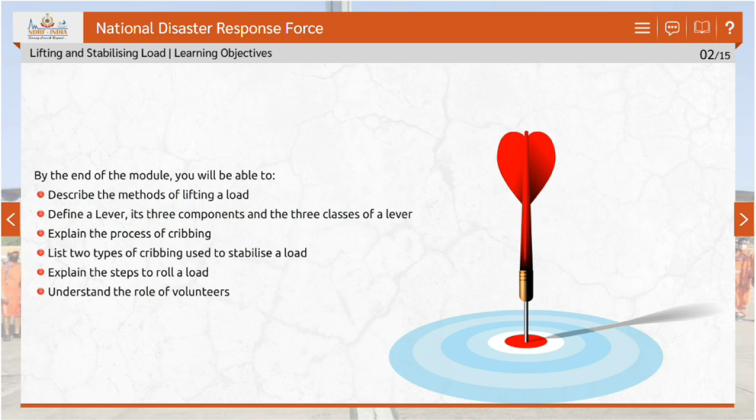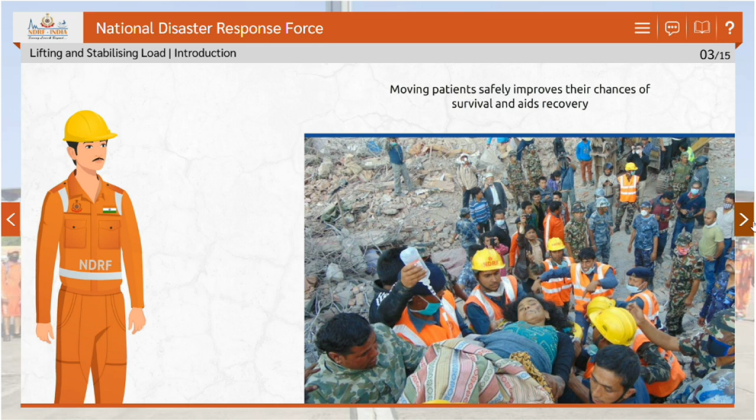When natural disasters or large-scale emergencies occur, it is important to move people who are hurt or in trouble to a safer place. The safe movement of patients will improve their chances of survival and aid in the recovery process. It is also important to clear debris from the affected areas as it helps the rescue teams access the affected area and prevent further injuries.

But how do we move the patients to a safer place without causing them harm? And how do we lift heavy loads while preventing injuries? Let's find answers to these questions in this module. Let's begin with understanding the rules for lifting loads.

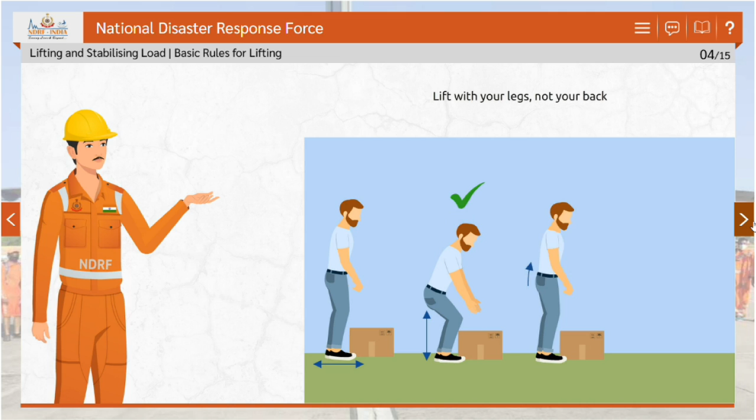In order to facilitate lifting and to prevent injury, we should maintain proper body posture. Here are the basic rules for lifting. Plan your move carefully and position your feet properly for stability. Lift with your legs, not your back. Keep your back as straight as possible while lifting. Try to avoid bending at the waist more than necessary. When lifting with one hand, avoid leaning to the opposite side.

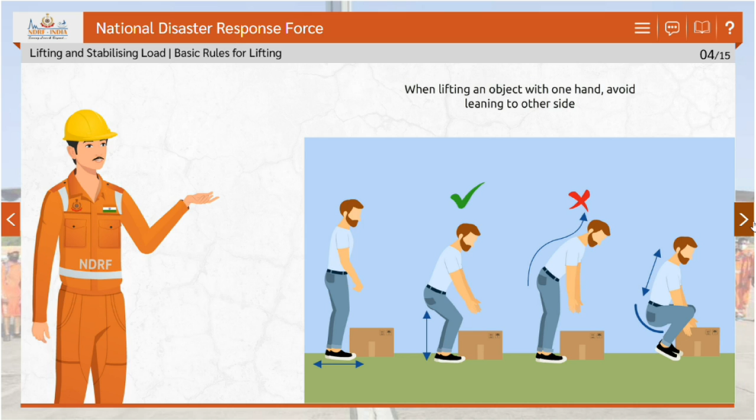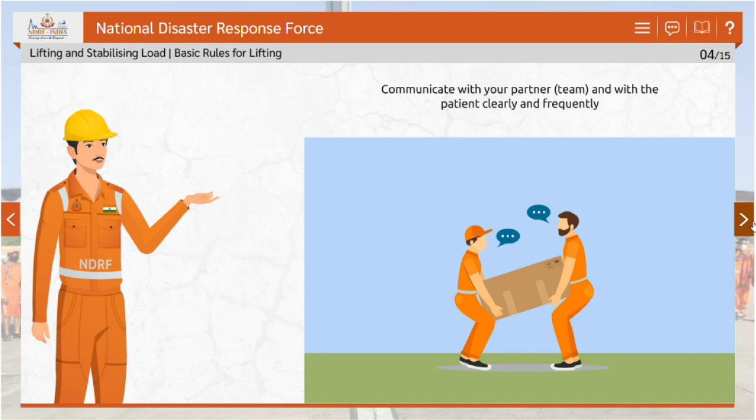Bend your knees to grasp the object, maintaining a straight back. Keep the weight of the object as close to your body as you can. While lifting a patient, maintain clear and frequent communication with your partner or team and with the patient. Maintain eye contact, an important aspect of coordination, and verbally coordinate moves from start to finish for safety and efficiency.

In disaster situations, lifting loads is a crucial task. It is essential to understand the principles of lifting a load to prevent further accidents and reduce strain. Let's now discuss the concept of lifting loads.

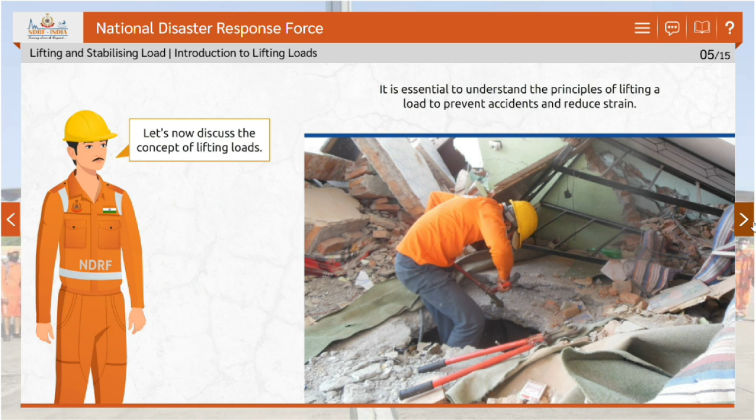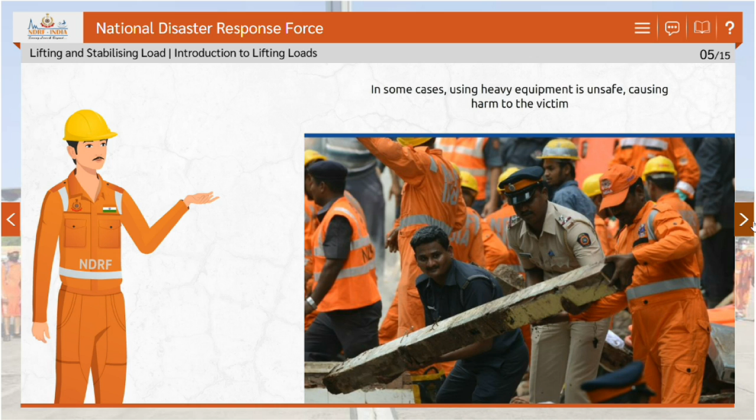Long ago, man learned that work done by machines is easier than work done with muscle power. However, in some cases, heavy equipment cannot be used because the movement or operation of that equipment might cause harm to the victim and lead to further collapse. In such situations, basic tools can be used to create tremendous mechanical advantage to lift large loads safely. Let's now discuss the methods for lifting loads.

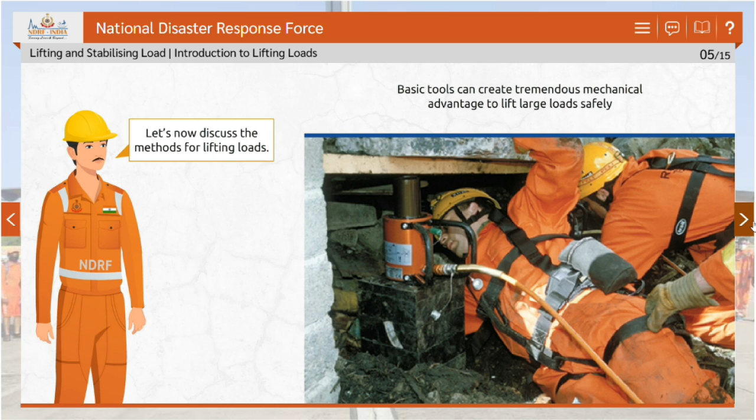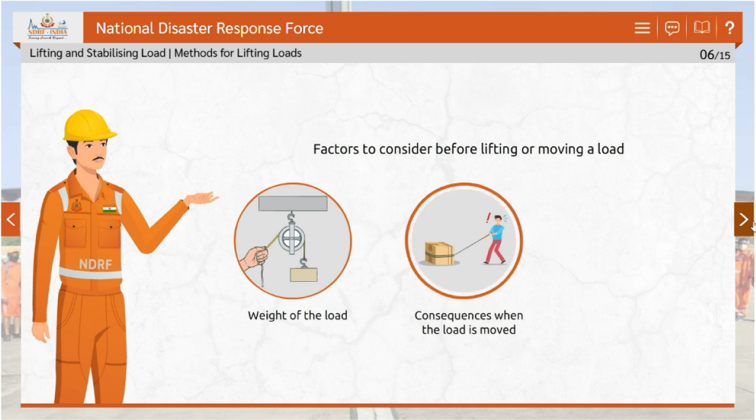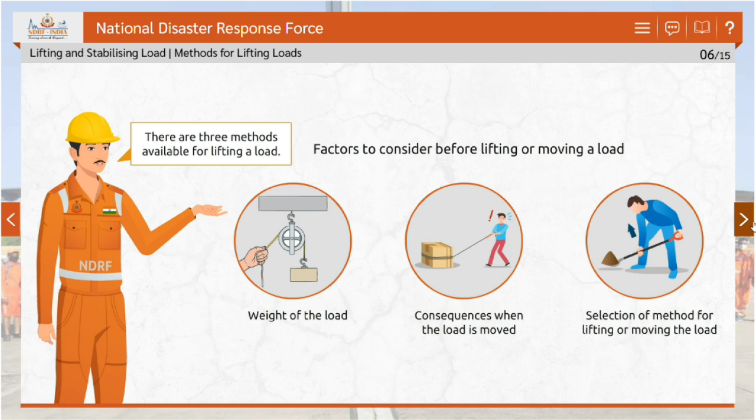Before lifting or moving a load, the following factors must be examined. Weight of the load, consequences when the load is moved, that is, what will happen, and selection of the method for lifting or moving the load. There are three methods available for lifting a load. These include the lever, the come-along, and hydraulic jacks or rams. Let's discuss these methods in detail.

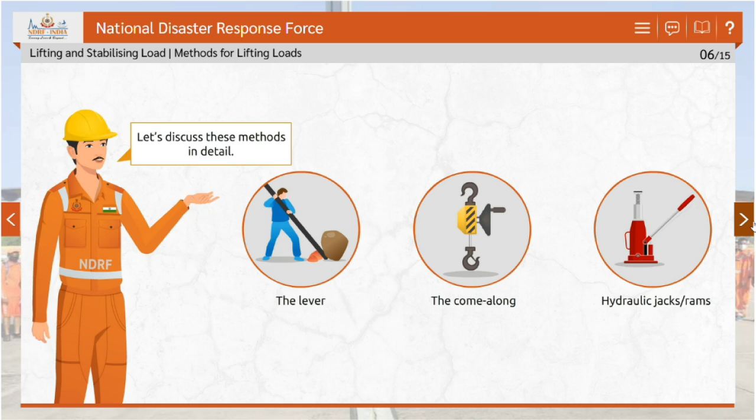The lever is a simple method for lifting a load. There are three components that make up a lever. These include fulcrum, load, and force. A lever is a rigid bar, either straight or bent, that is free to move on a fixed point called a fulcrum. The fulcrum is the object or place that supports the load when a lever is used to move another object.

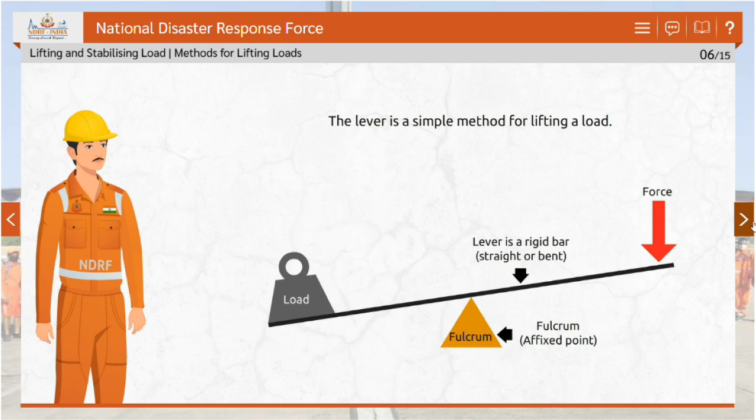Some of the applications of levers are moving a load that is too heavy to move by hand, pulling or hauling, and raising. Some of the common examples of levers are the shovel, crowbar, pliers, hammer, scissors, and wrench. There are three types of levers: Class 1 lever, Class 2 lever, and Class 3 lever. Drag the pointer to each type of lever to know more about it.

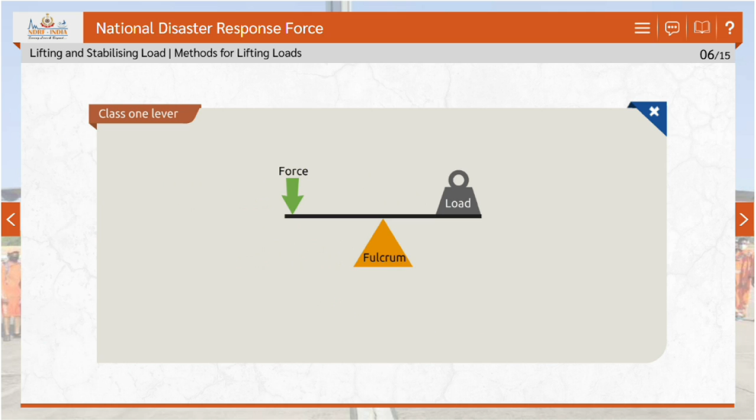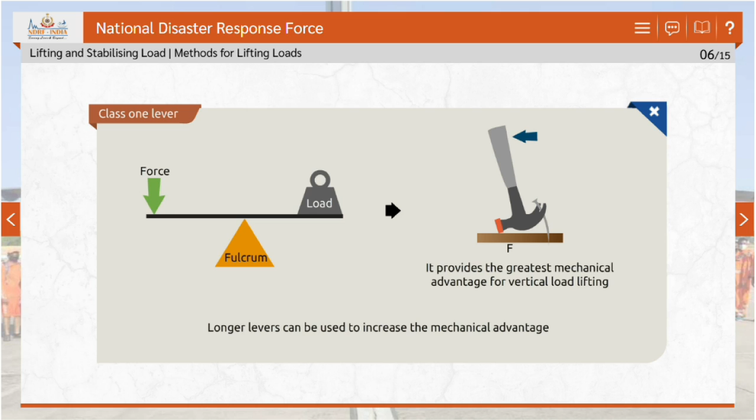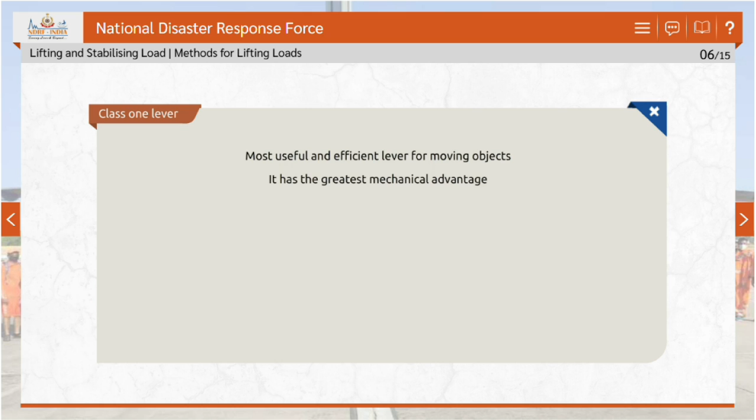In Class 1 levers, the fulcrum is placed between the force and the load. This arrangement provides the greatest mechanical advantage when lifting a load vertically. You can increase the mechanical advantage by using a longer lever. This is the most useful and efficient lever for moving objects horizontally. It has the greatest mechanical advantage. Crowbar and pry bar are good examples of a Class 1 lever. They are very useful for lifting objects vertically.

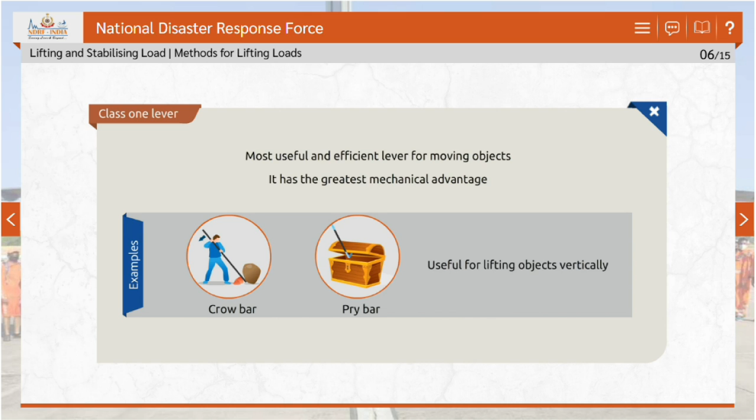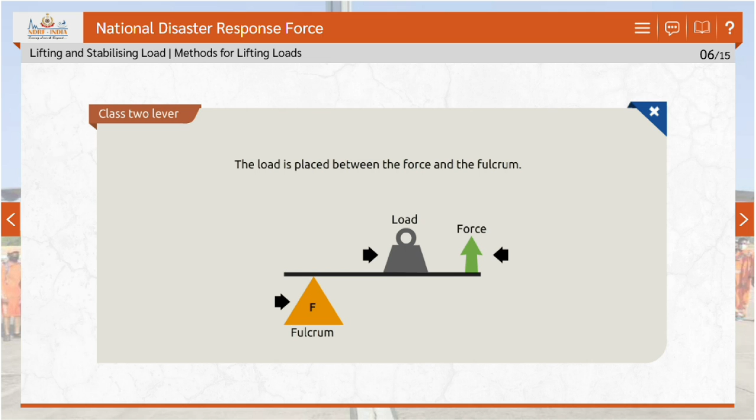In a Class 2 lever, the load is placed between the force and the fulcrum. It consists of a fulcrum at one end, a load in the middle, and a force on the other end. Wheelbarrows are a type of second-class lever. It is a very useful and efficient lever for moving objects horizontally.

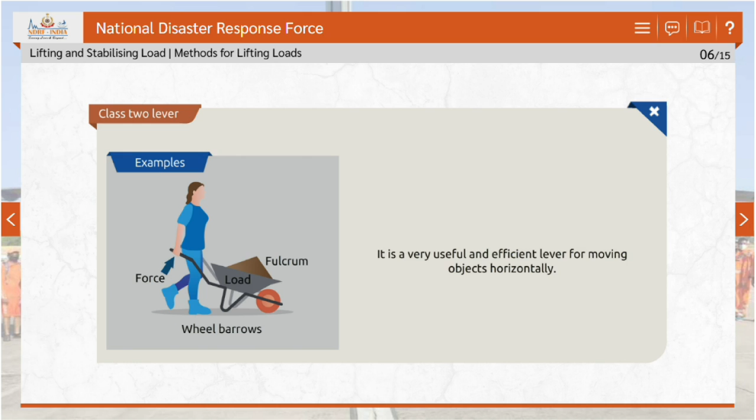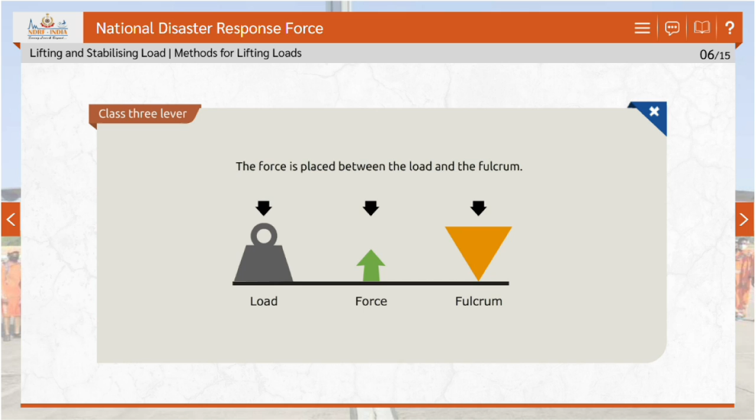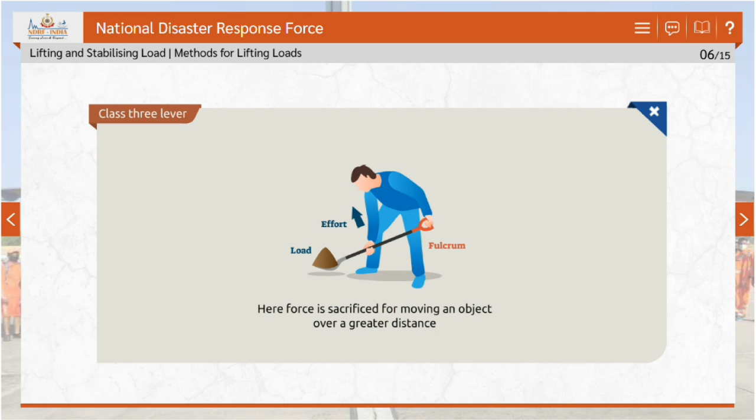In a Class 3 lever, the force is placed between the load and the fulcrum. It places a load on one end, the fulcrum on the opposite end, and the force in the middle. This type of lever is used when force may be sacrificed for the advantage of moving an object over a greater distance. Shovels and brooms are examples of third-class levers.

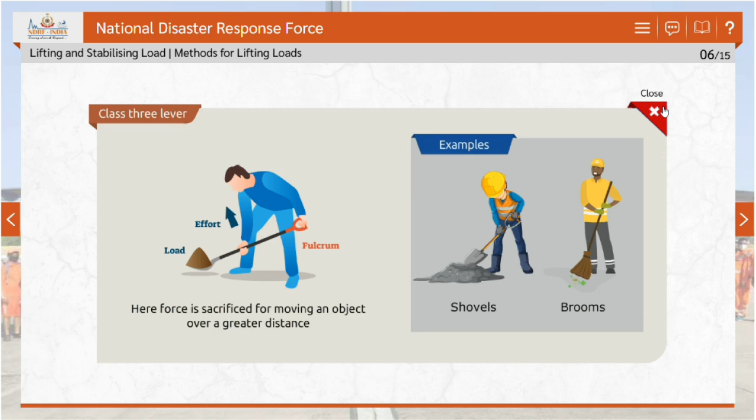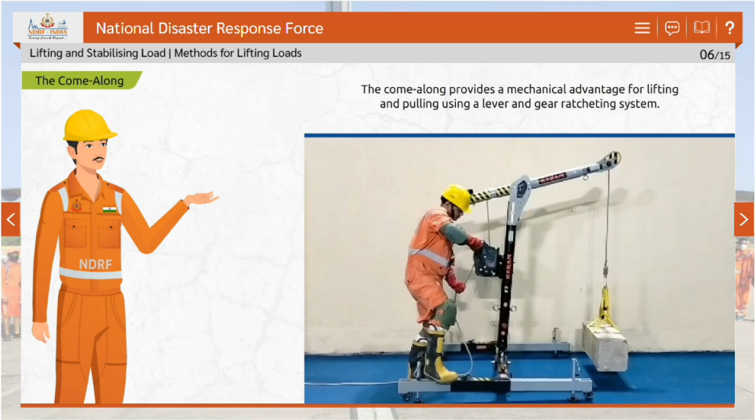Let's now discuss the come-along method for lifting a load. The come-along provides a mechanical advantage for lifting and pulling using a lever and gear ratcheting system. It consists of an anchor hook on one end and a load hook attached to a retractable chain or steel cable.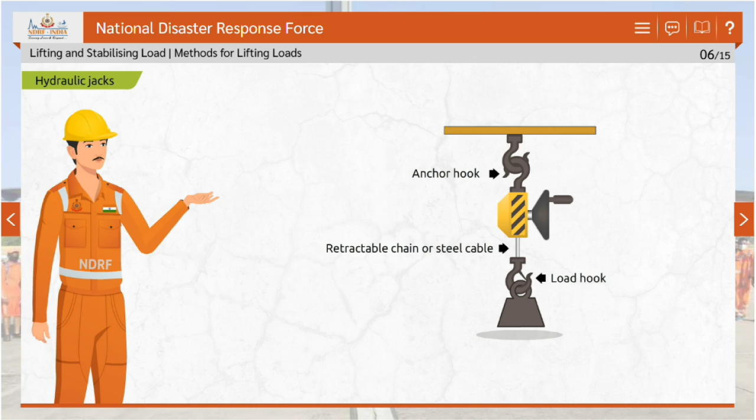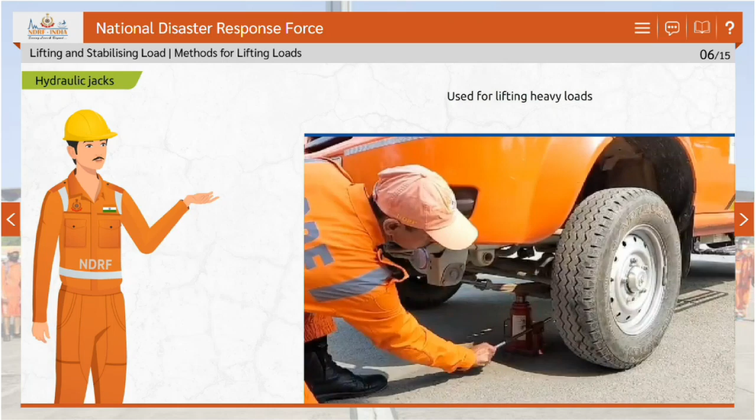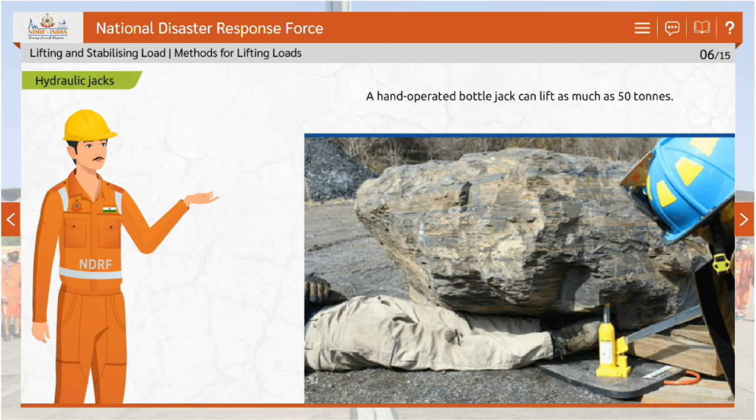Hydraulic jacks are operated with a lever to apply force to a ram. These devices are used primarily for lifting heavy loads. Though they usually have only a short reach, they are extremely powerful. A hand-operated bottle jack can lift as much as 50 tonnes. It is important to keep the hydraulic jack stable to the ground. The jack is not designed to handle lateral loads.

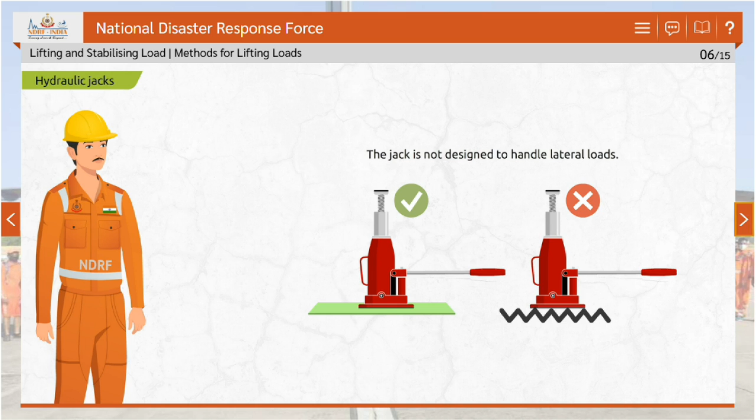During rescue operations, when searching for a trapped person, there will be a need to lift a load. In such situations, you need to ensure the safety of the rescuer along with the trapped person. To achieve this, temporary support is required to lift the load. One quick, simple method of temporary support is known as cribbing. Let's now discuss the method of cribbing used to stabilize and support loads.

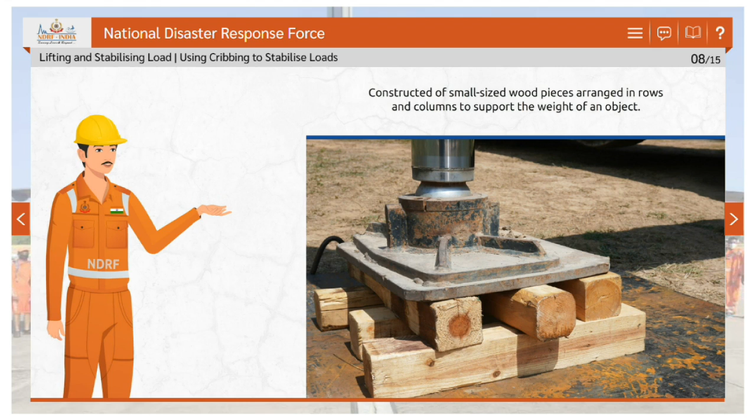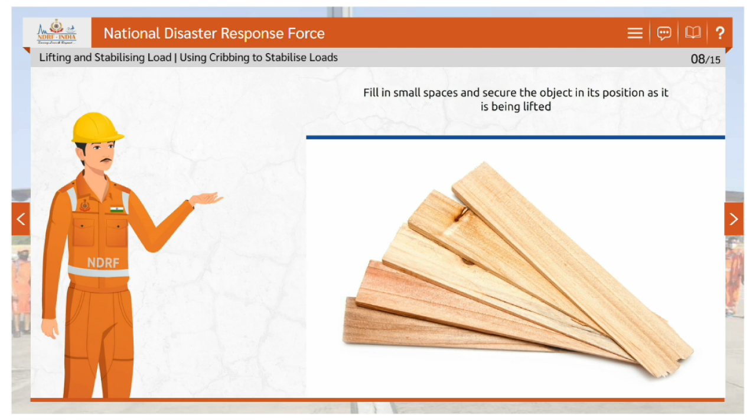Cribbing is the construction of a stable platform using wood pieces to provide stability and support for loads. Cribbing is constructed of small-sized wood pieces arranged in rows and columns to support the weight of an object. Shims are used to fill in small spaces and secure the object in its position as it is being lifted. Shims are also used to change the angle of thrust in order to achieve optimum contact with uneven or sloping surfaces.

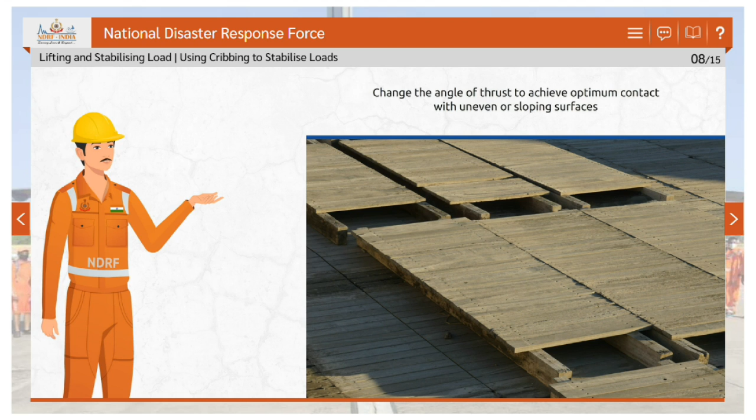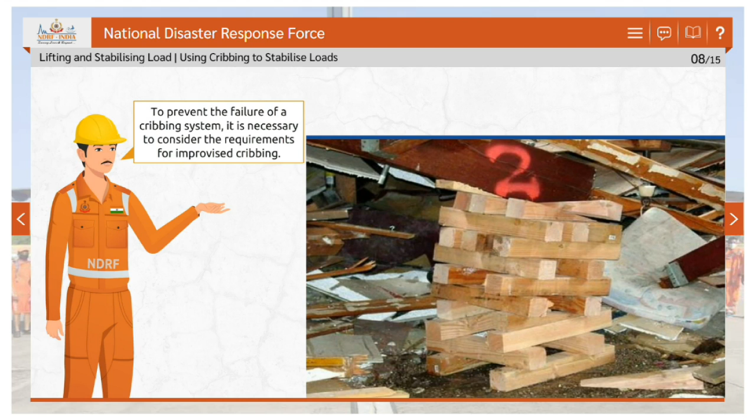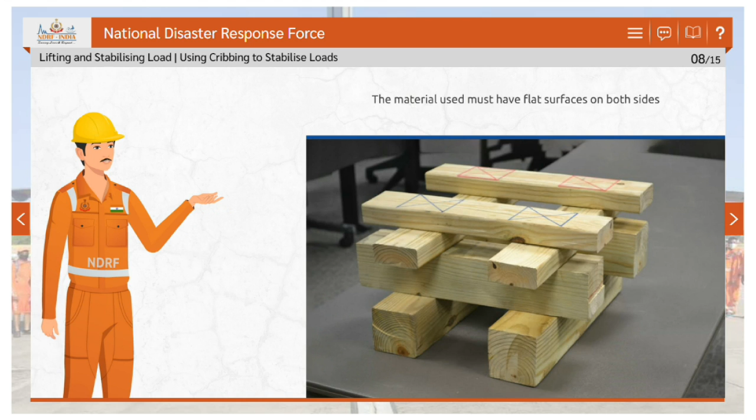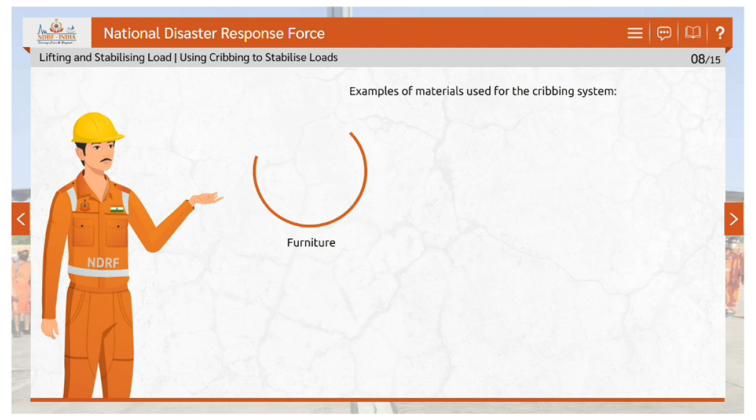The failure of a wood cribbing system is slow and noisy as the wood fibers are crushed. This usually provides ample warning of impending failure for rescuers. To prevent the failure of a cribbing system, it is necessary to consider the requirements for improvised cribbing. The requirements are as follows. The material used must have flat surfaces on both sides, and the material must be able to withstand the weight of the object being supported. Examples of materials used for the cribbing system include furniture, bricks, concrete blocks, tires, and rims.

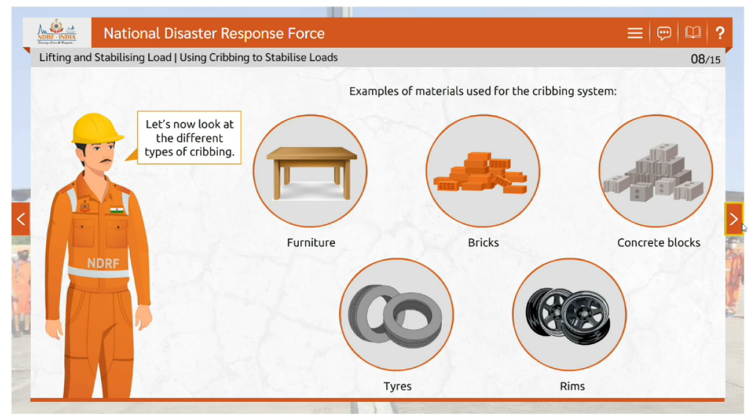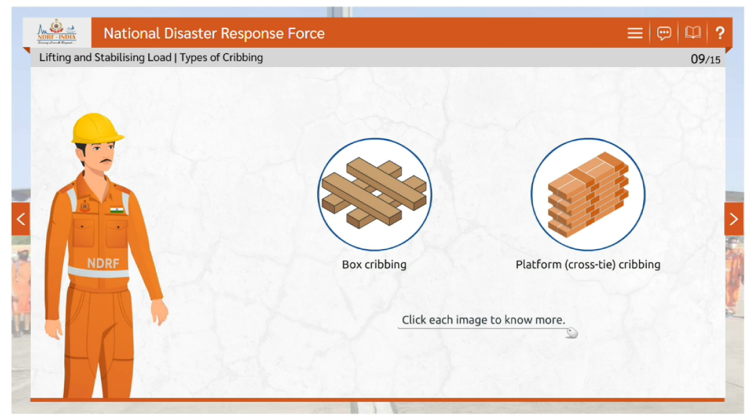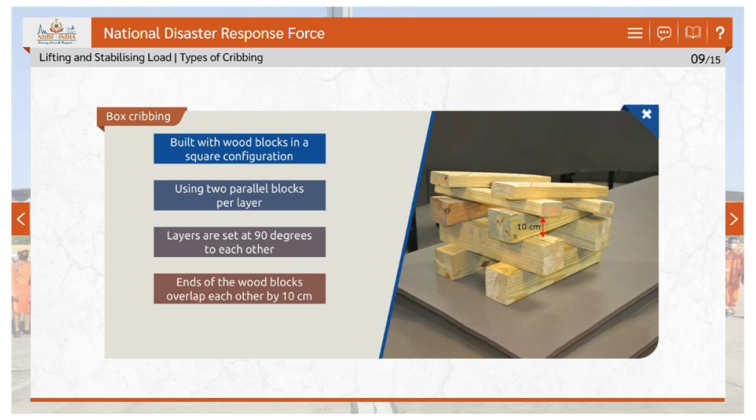Let's now look at the different types of cribbing. There are mainly two types of cribbing: box cribbing and platform or cross-tie cribbing. Click each image to know more. Box cribbing is built with wood blocks in a square configuration, using two parallel blocks per layer. The layers are set at 90 degrees to each other with the ends of the wood blocks overlapping each other by 10 centimeters. The box crib has an open center.

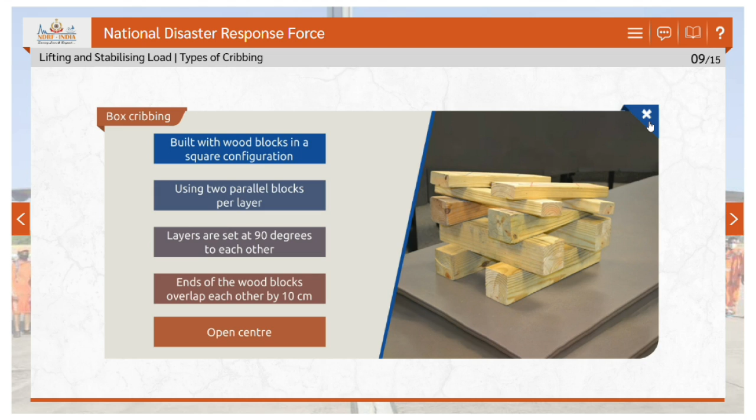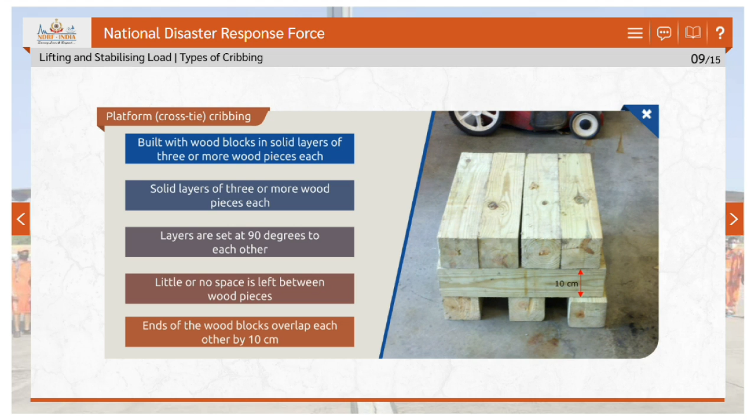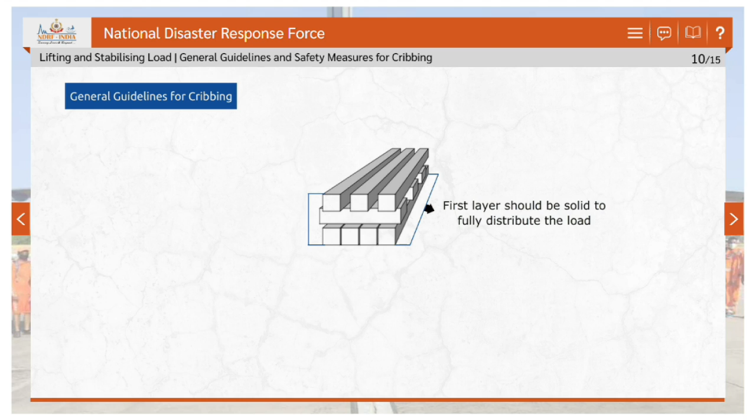Let's now discuss the guidelines and safety measures for cribbing. The general guidelines for cribbing are: the first layer should be solid to fully distribute the load, especially on softer surfaces such as soil and asphalt. The general rule is to limit the cribbing height to 3 times the width of the pieces of wood being used for cribbing, which is a 3:1 height-to-width ratio. For example, if the pieces of wood are 1 meter wide from one side of the first crib to the outer side of the last crib, the cribbing should not exceed 3 meters in height.

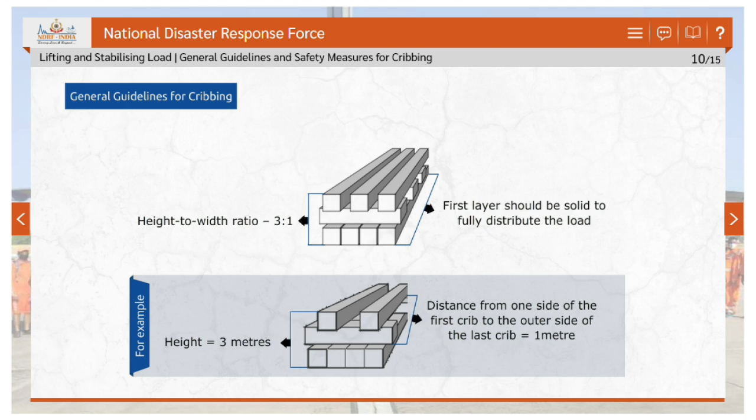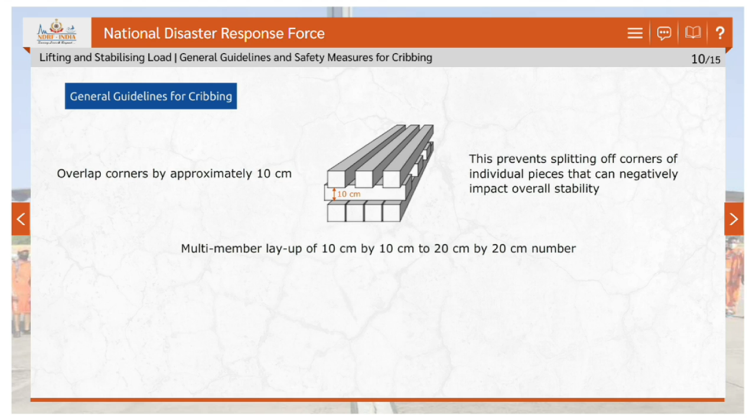Always overlap corners by approximately 10 centimeters. This prevents splitting of corners of individual pieces that can negatively impact overall stability. The cribbing should involve a multi-member layup of 10 centimeters by 10 centimeters to 20 centimeters by 20 centimeters lumber in 2 or 3 member per layer configuration.

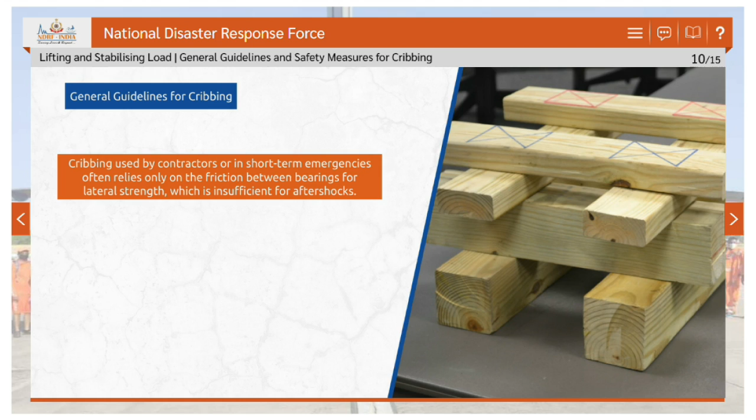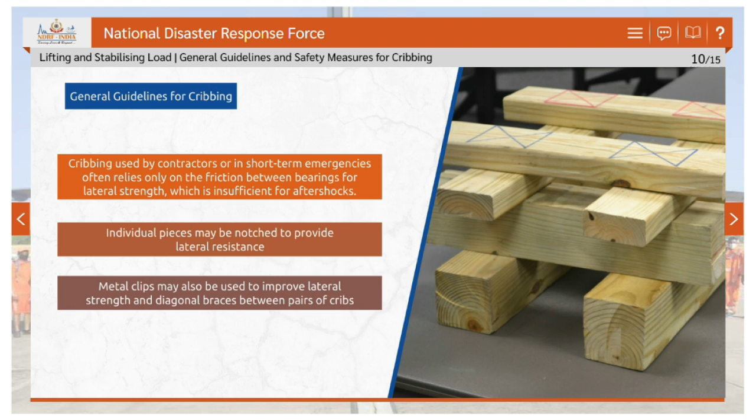The load-bearing capacity of wood depends on the type and quality of wood. The capacity is determined by the perpendicular to grain load applied to the sum of all bearing surfaces. Cribbing used by contractors or in short-term emergencies often relies only on the friction between bearings for lateral strength, which is insufficient for aftershocks. Individual pieces may be notched to provide lateral resistance in addition to the friction between pieces. Metal clips may also be used to improve lateral strength and diagonal braces between pairs of cribs.

Here are the safety measures to be followed while setting up a cribbing system. Lift an inch and crib an inch. Never place hands beneath a load while cribbing, and for maximum stability, the height of the cribbing should not be more than 3 times the width of the cribbing blocks, that is, 3:1 ratio.

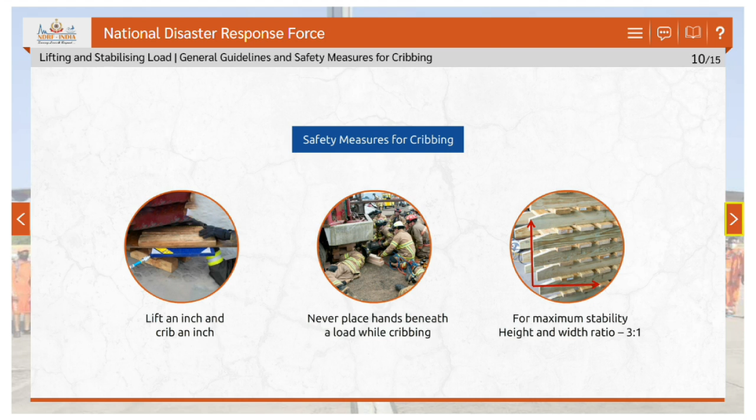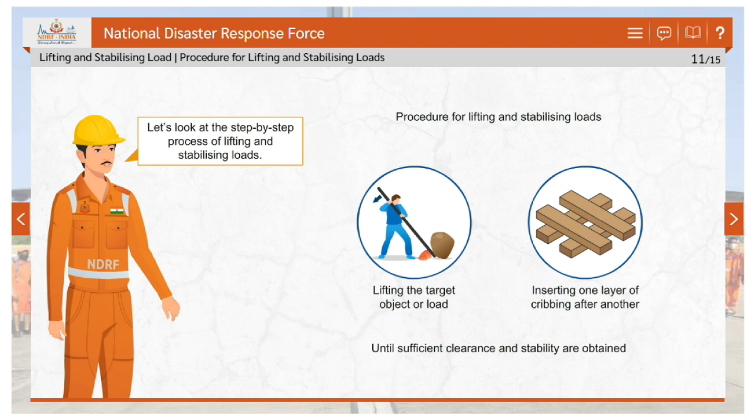Let's next discuss the procedure for lifting and stabilizing loads. The procedure for lifting and stabilizing loads consists of gradually lifting the target object or load and inserting one layer of cribbing after another until sufficient clearance and stability are obtained. Let's look at the step-by-step process of lifting and stabilizing loads. Make sure to use full personal protective equipment or PPE before starting any work.

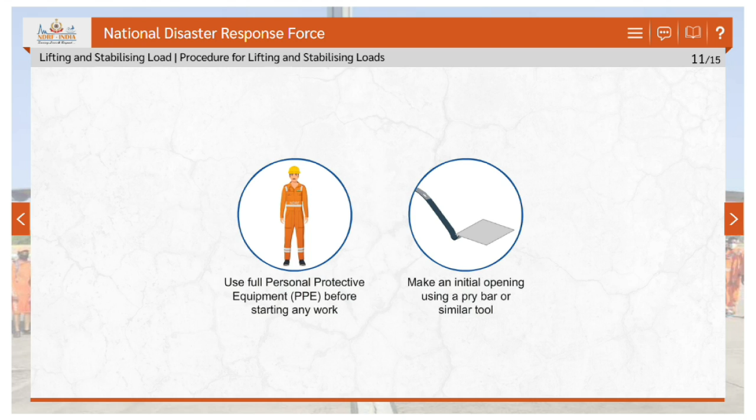Make an initial opening using a pry bar or similar tool. Set up a lever system with the pry bar. Lift the load gradually to create an opening large enough to set up the first layer of cribbing under it. Use wedges to prop up the load gradually as you are lifting. If the pry bar slips or breaks, this will prevent the load from dropping any distance.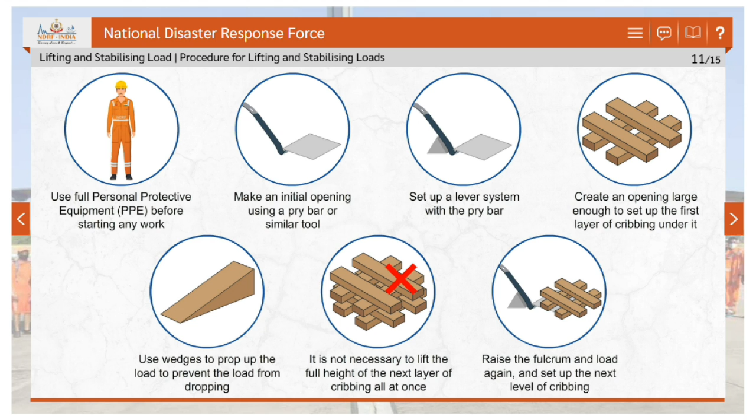It is not necessary to lift the full height of the next layer of cribbing all at once. Raise the fulcrum, raise the load again, and set up the next level of cribbing with the wood pieces at 90 degrees to the previous layer. The video shown here demonstrates the procedure for lifting a load and inserting cribbing under it.

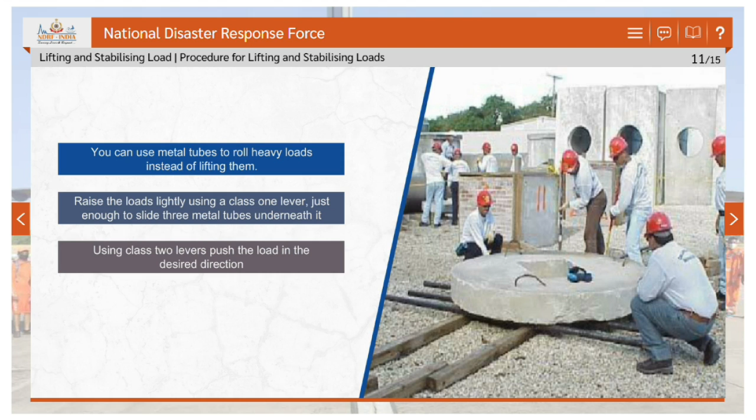You can use metal tubes to roll heavy loads instead of lifting them. Follow these simple steps as a guide for rolling a load. Raise the load slightly using a class 1 lever just enough to slide 3 metal tubes underneath it. Use the lifting technique for cribbing, then, using class 2 levers, push the load in the desired direction. The tubes may be fanned to turn the load as it rolls. The video shown here demonstrates the procedure for rolling a load.

Next, let's learn about the role of volunteers. Volunteers can help in many ways. Volunteers can help responders in ensuring the safety of the victims by clearing hazards present at the incident site. Volunteers can help rescuers in carrying injured victims manually or using a stretcher. They can also help MFRs in dressing and stabilization of injured victims.

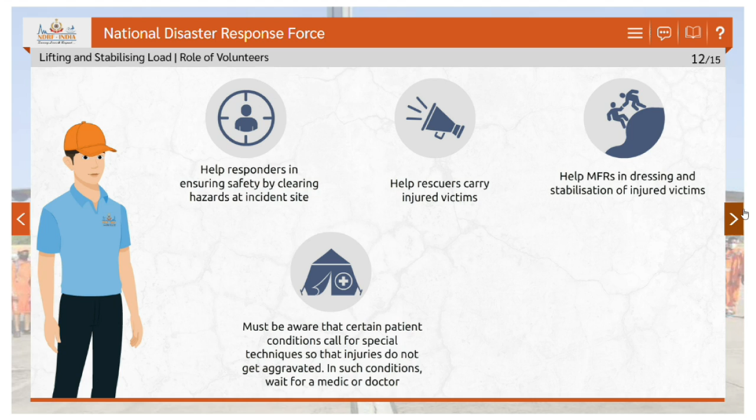Volunteers must be aware that certain patient conditions call for special techniques so that injuries do not get aggravated. In such conditions, wait for a medic or doctor. Volunteers may help medical staff in the maintenance of a basic life support system.

With this, we have come to the end of the module. Let's recollect the key points discussed in the module. During disasters, it is important to move injured people to a safer place. There are two different situations for moving patients: when there is no threat of injury and when the scene is potentially unsafe or poses an immediate threat.

Patient moving techniques are classified as emergency moves and non-emergency moves. Situations requiring emergency moves are fire, explosion, and inability to protect the patient from hazards. A non-emergency move is preferred when the patient is stable and you have adequate time and personnel for the move. There are 3 methods available for lifting a load. These include the lever, the come-along, and hydraulic jacks or rams.

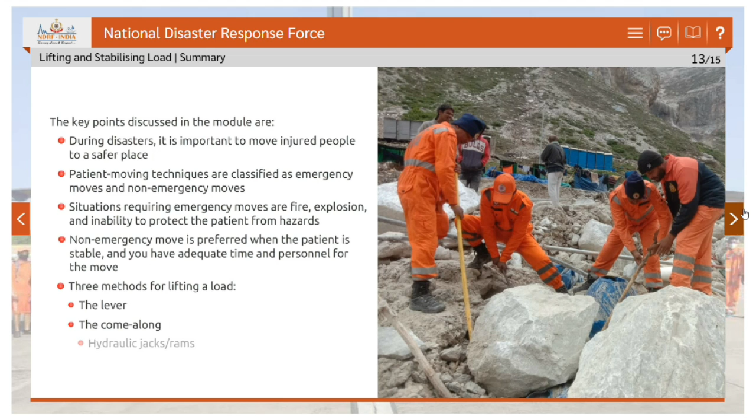A quick and simple method of supporting the load temporarily is known as cribbing. Cribbing is made up of small-sized wood pieces arranged in rows and columns to support the weight of an object. There are mainly 2 types of cribbing: box cribbing and platform or cross-tie cribbing. The procedure for lifting and stabilizing a load consists of lifting the target object or load and inserting one layer of cribbing after another until sufficient clearance and stability are obtained. Volunteers can help rescuers in ensuring the safety of victims.